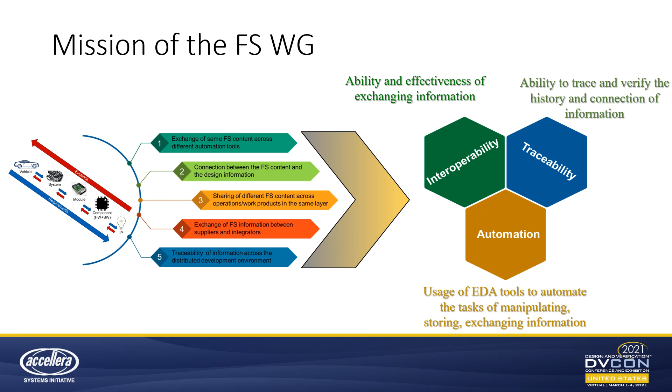So our first objective has been to provide a functional safety standard that would accompany the traditional design standards and support the need of the functional safety of the safety critical life cycle. So the first step has been to find common ground in the best practices and methodologies across the industry. And then we started to define the functional safety data to enable the data exchange and manipulation. Om will cover this in great detail in the second part.

So this has been our first initial focus, but in parallel, more topics are considered for exploration since they are related to and influence the way the functional safety model is defined. And Gani will cover these future directions in the last part of the workshop.

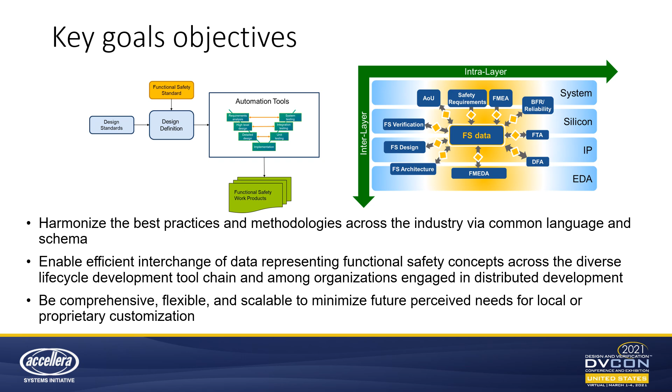One last point before we move on with the rest of the presentation is actually a specification about the type of work that is presented here. We were very keen on presenting the update on the progress we've made and the projects we have, but please consider everything that we are sharing today work in progress, as the group is very active, a lot of discussions are ongoing, and things will probably change and progress as we move along. So just a caveat as we move along with the rest of the presentation.

Hello everyone. In this presentation, I'm going to show what are the motivations of the Accellera Functional Safety Initiative, who are the stakeholders, and the overall scope of the activity.

As we know, the ever-growing implementation of electronic systems for safety-critical applications is posing a growing risk associated to the possible failure of such systems. The definition of functional safety standards such as ISO 26262 for the automotive industry or IEC 61508 for industrial applications and other standards is made with the intent to give guidance to the suppliers of those systems on how to mitigate those risks during the product life cycle.

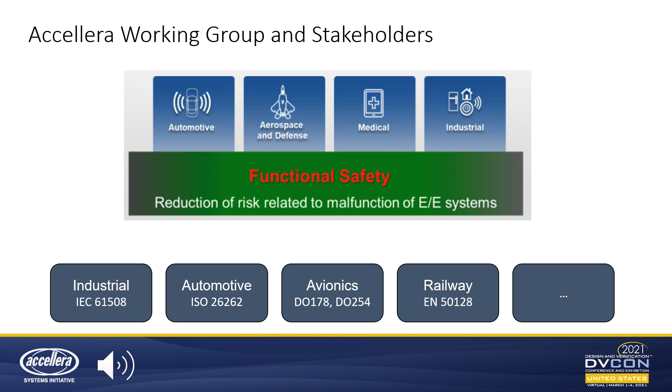In this context, Accellera formed a working group of functional safety practitioners and experts with the intent to develop a standard aiming to provide a consistent definition of the functional safety data to be exchanged among different actors of the industry in order to improve automation, interoperability, and traceability. The standard aims to specify a data model, language, or format in order to exchange data seamlessly among functional safety artifacts and across the different layers of the supply chain.

To achieve functional safety of an entire product, such as a car, for example, or an aircraft or an industrial robot, the system and all its components are developed taking care to avoid or mitigate all the major risks associated to possible product malfunctions.

All the parties participating in the system development, the suppliers of IPs, components, modules, and the vehicle or robot itself, must all work together to achieve safety goals identified for the system in order to minimize such risks. The problem is that such a collective effort is distributed among different companies who therefore need to coordinate their outcome in order to ensure consistency of the safety goal of the final product.

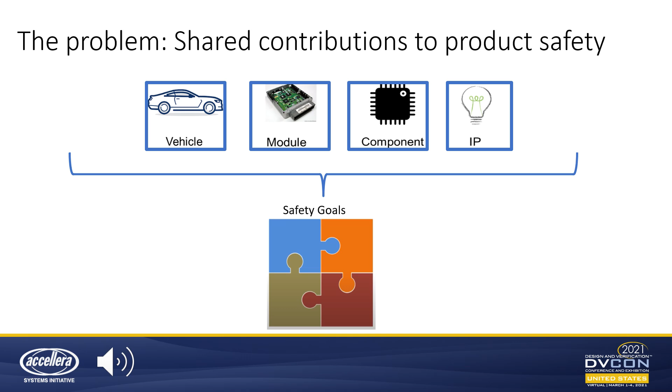The life cycle of the development process of safety-related products requires the generation and the management of interrelated categories of information at all development stages. This information may be generated in diverse formats using a variety of electronic design automation tools and originate from all the various suppliers participating in the product development.

Despite having a myriad of sources, all this information must be integrated and exchanged among different organizations while maintaining their integrity and consistency throughout the whole supply chain for the achievement of the functional safety goals of the complete product. The objective of this standard is to foster the exchange of this data between organizations and tools with high integrity and traceability.

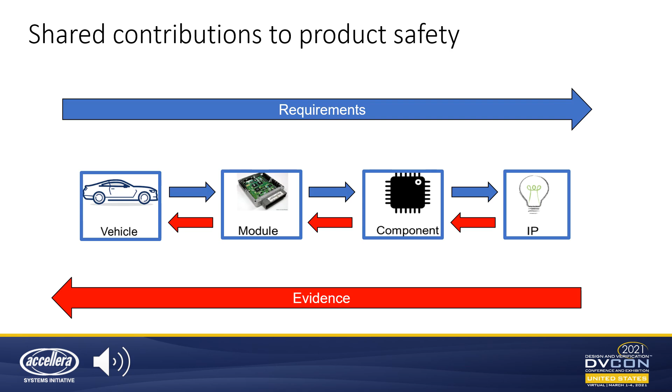Here is an example of activities and work products possibly associated with a safety product from the perspective of different suppliers. Starting from the bottom of the table, the IP and the component suppliers develop their product out of context, that is, knowing the reference market, but most of the time without the knowledge of the specific application their product will be used for. Because of that, for functional safety, they used to do a bottom-up analysis, starting from the basic fault models of their technology.

As a result, for those suppliers, the definition of the safety requirements of their product is associated more to the reliability of the function declared in their product specification, rather than to real safety goals whose violation could harm someone. It's up to the module and final system suppliers, then, who are integrating the IP as a component and who have the partial or full visibility of the possible bad consequence of a failure, to put together this information in a coherent manner, consistent with the safety goals of the final product.

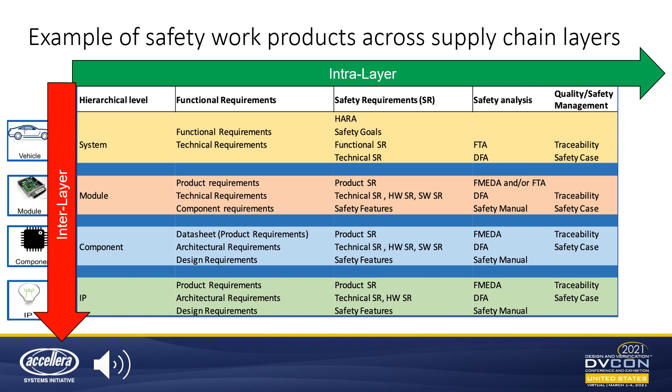We can see that not only it is needed to link the outcome of the different companies composing the supply chain, but also inside the same company many different work products are being produced and need to be stitched together to form a coherent safety case for the subsystem they supply. This poses an opportunity for standardization that should result as an advantage for the whole industry.

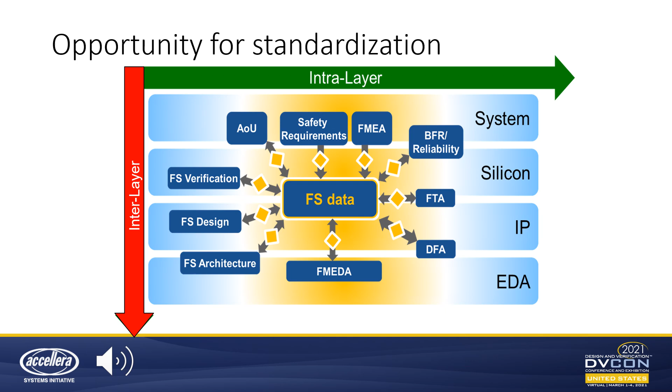Consequently, the Accellera working group has defined the following objectives: to define functional safety data content needed to support activities and work products generation from IP to system level in both interlayer and intralayer use context. To define a language or a format or a channel to exchange this information across distributed development environment of the functional safety lifecycle.

The standardization of data exchange will result in advantage for the suppliers at different levels of the supply chain who need to exchange and have traceability on safety requirements, safety analysis, verification evidence, etc. It will be an advantage for the system owner who owns the safety case of the whole system, is the one interacting with the public and regulator, and is the first actor involved in case of lawsuit. Therefore, it has all the interest to achieve clarity and completeness of the evidence supporting the safety case.

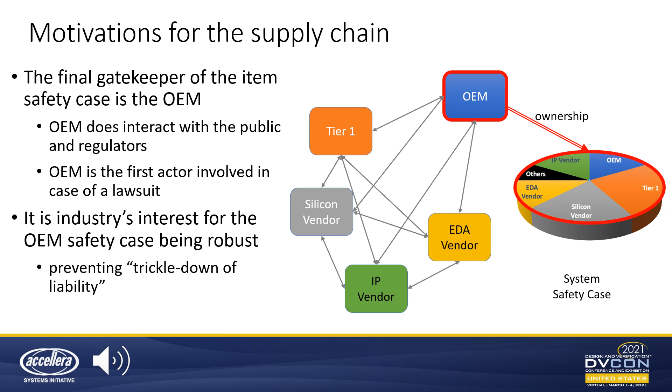But for this very same reason, it is also in the interest of the rest of the industry that the data and their structure are crystal clear for the system owner, in order to avoid involving the system suppliers in case of lawsuit due to lack of data clarity. The standardization of data and of work product structure would allow a better review of the work product provided by a supplier to their client, if it is clear from the beginning what is the expected format of the evidence that will be given. This in principle is true at all levels of the supply chain.

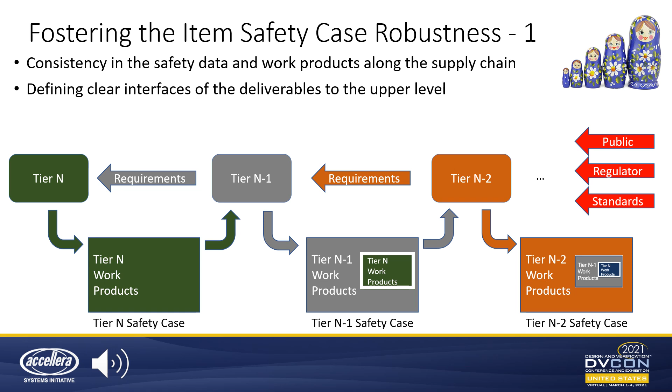Let's imagine a Tier 1 who needs a set of work products and data from different silicon vendors as evidence of the definition of safety requirements for the semiconductor components used at system level, their safety analysis and the verification evidence. Currently, the format is left to be defined by the suppliers, or in some few cases the Tier 1 is in the condition to define them in advance with their suppliers as part of the technical negotiation. In both cases, the integration requires an effort that could be quite reduced if the format was a given from the start for every actor involved.

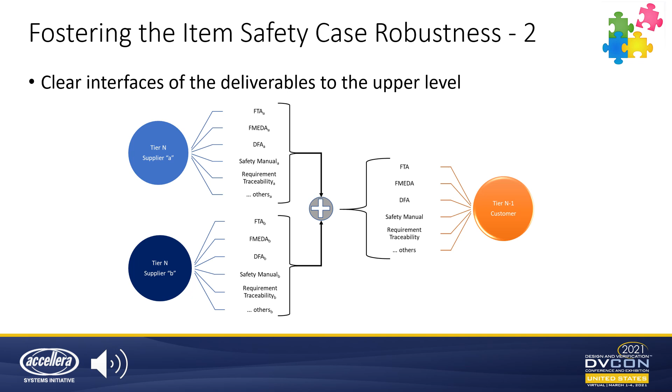If we look at the issue from the semiconductor vendor perspective, today there is quite an effort spent to explain the format of the data provided to their customers, show their completeness, and in many cases customize their format depending on the customer needs. This is the case for semiconductor vendors, but also for any suppliers like IP vendor, Tier 1, or even EDA vendor. Most of this effort and unnecessary variability could be saved if the data and work product format was defined from the beginning for everyone.

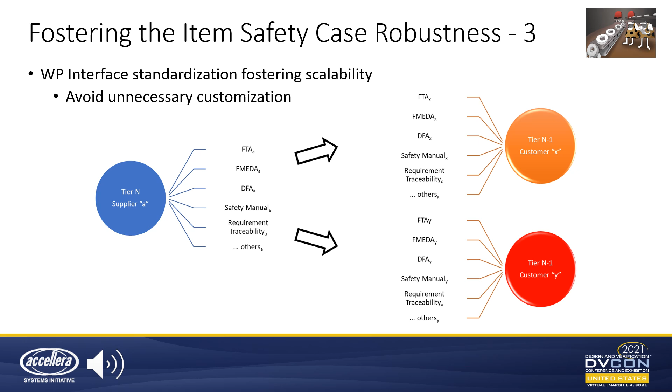An important aspect of managing functional safety development is the requirement for traceability of information, that is, the ability to have an origin and a course of development to follow through the chain of requirements and modification that a product goes through.

This holds true for both intra-layer and inter-layer management, but can be especially challenging when different actors in the supply chain are involved. In case of a liability case, for example, traceability is key to identify the root cause of the accident. On a more regular basis, traceability is also required to perform an impact analysis, which relies on a solid change management system. Similarly, it allows for verification and validation of requirements as captured in the V model.

Another example of the need of recorded and documented information are the assumptions of use involved in the development of a safety element out of context. That is the definition of safety requirements by the component vendor to their customers in order to preserve the safety of the component during system integration.

The functional safety standards require to maintain and demonstrate traceability of the safety data across levels in the supply chain and among work products, with information justified, documented, and preserved for years in a safety case.

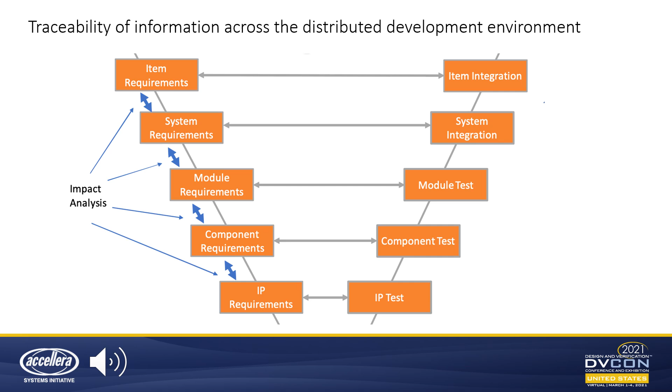Although several products and strategies are available to aid the ability to trace information, a full holistic approach is not available, and a non-negligible portion of the safety data exchange is handled manually or ad hoc, leading to an error-prone and effort-intensive solution. A clearly defined and standardized format for the exchange and integration of functional safety data can significantly improve the efficiency and confidence in the integrity of the development process.

To recap, the mission of the Accellera Functional Safety Working Group can be summarized in these three characteristics of the development process: interoperability, traceability, and automation.

The goals of the Functional Safety Working Group are to unify and standardize the methodology to exchange functional safety data for functional safety activities, such as analysis, verification, validation, optimization, implementation, to produce work products such as FMEA, FMEDA, assumptions of use, fault tree analysis, dependent failure analysis, safety requirements. Define a language format to exchange the functional safety data across the distributed development environment of the functional safety lifecycle.

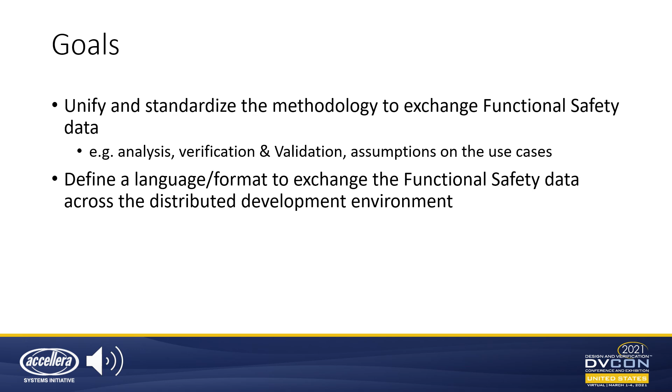The scope of this effort develops across several dimensions. These are illustrated in this slide, but it is not meant to be an exhaustive categorization. The green boxes define the scope of the Functional Safety Working Group and capture how the work will proceed in phases. The immediate focus aligns with the content below the dotted lines, while the content above is planned as a next step.

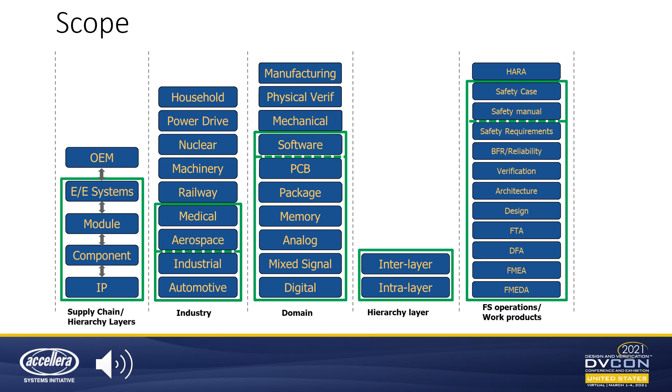Hello everyone. In this presentation, I will talk about challenges in the domain of functional safety and then about the work being done in Accellera Functional Safety Working Group to enable the community.

Functional safety data and the scope. What is functional safety data? We at Accellera Functional Safety Working Group define functional safety data as the information needed to perform functional safety operations and generate the associated safety work products. The goal of such standardized safety data is to enable interoperability and traceability across work products and processes within a development level or across the supply chain, that is intra-layer or inter-layer.

Such data should allow to develop an industry-wide functional safety aware flow to bridge the gap between the well-established methodologies for design and verification of the products and the ever-growing requirements for safety work products, covering different domains, industries, and supply layers. I would like to highlight that the goal of this exercise is not to standardize, for example, the functional safety analysis format, which is already covered by the existing safety standards, but to enable the realization of the requirements of the standard.

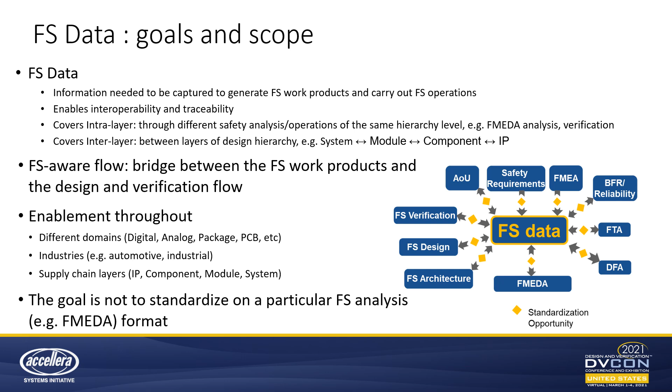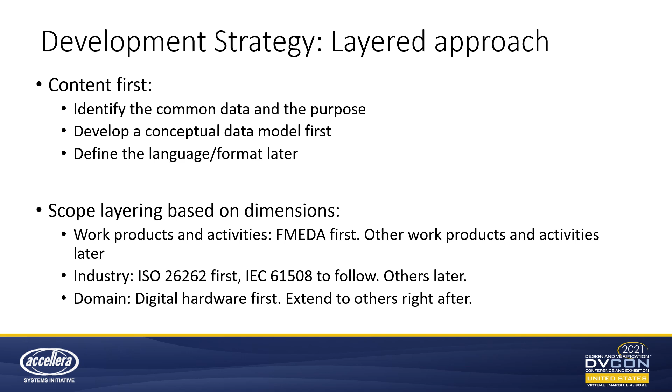A layered approach has been adopted for the development of the functional safety content standard, where the focus is to identify and agree on the content first as part of the conceptual data model. The conceptual data model then drives the language format of the functional safety data. Similarly, scope is layered based on dimensions, namely work products and activities, industry segment governed by the relevant safety standard, and the domains like digital hardware and others to follow.

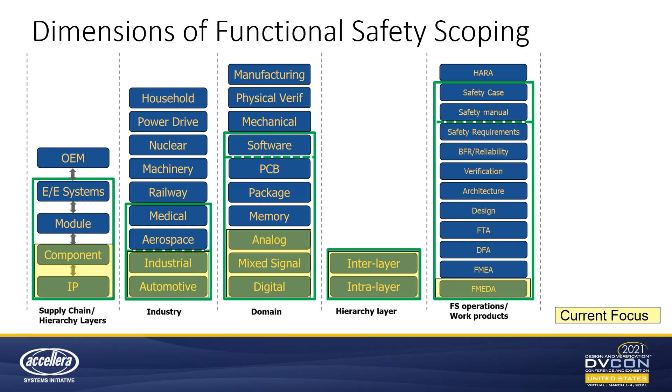The scope of the data model activity is spread across industries, domains, and stakeholders in the supply chain over the safety work products. Current efforts are focused on enabling the automotive semiconductor industry in the safety analysis, primarily FMEDA, by standardizing functional safety content.

The engagement targets silicon, for example system on chip, discrete but medium to high complexity components like analog to digital converters, digital to analog converters, sensor modules, etc., subsystems composed of multiple intellectual properties, and intellectual properties. Subsystems and IPs include RTL and hard macros, while SoC refers to manufactured silicon.

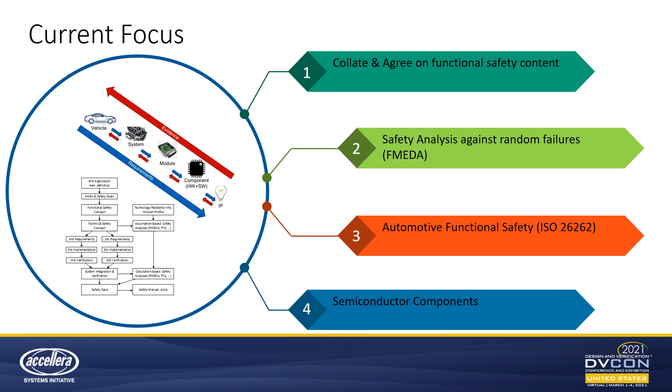Traditionally, in the automotive sector, safety processes had been native to the system and vehicle developers. Thus, the risk was better controlled. With the proliferation of complex electronics into safety systems, the development has become distributed. This has increased the underlying risk and shared responsibilities.

Development of the safety analysis report for use by the end customer is long, arduous, and not so well defined for developers and integrators at each level, that is system, silicon, and intellectual property. It is a much bigger effort for the integrators to create a consistent and reliable output from inputs originating from diverse suppliers, that is, the interlayer communication.

System integrators have to deal with varied information like faults and failures from diverse suppliers. Suppliers have to fulfill requirements coming from different integrators. The product has to comply with multiple safety standards when serving diverse industries. The intra-layer safety analysis has to evolve consistently, accurately, and reliably during the development phase.

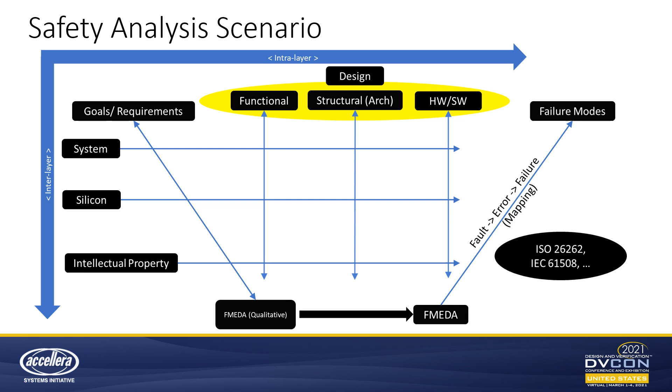The functional safety data model shall capture and classify all the information needed to realize the different safety processes and the work products. It shall include all data independent or related to other safety work products within a layer or across layers. Independent data like failure rates, interlinked data, for example, between FMEDA, DFA, and safety manual. At present, focus is on FMEDA of IP and component.

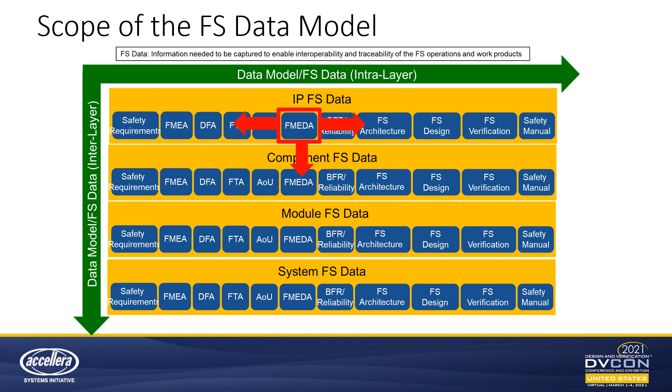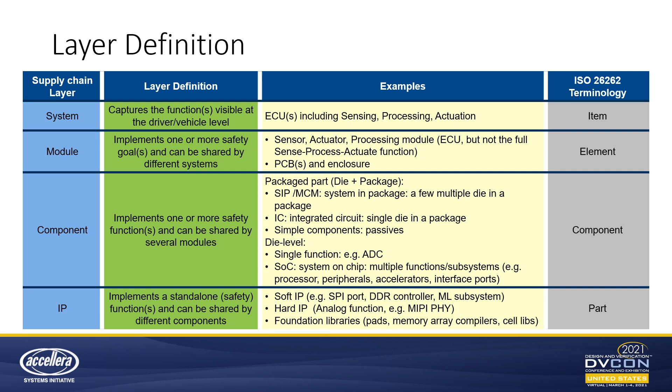The definition of layer has been redefined in the Accellera case to be generic for global relevance and hence to fit different standards. We will now reflect on the activity of the working group towards the functional safety data model necessary to harmonize the industry-wide effort on safety analysis at inter and intra-layer.

The task related to the FMEDA data model has been layered into 3 steps. The first step has been to arrive at a consensus on a generic approach, which serves the concurrent practices and is flexible enough to serve the currently unforeseen methods in future as the product development methodologies and technologies are evolving. Formalization of the functional safety analysis process is the next step which should lead to development of the conceptual data model. Finally, the activity shall culminate into a data model language which should enable interoperability, traceability, and automation.

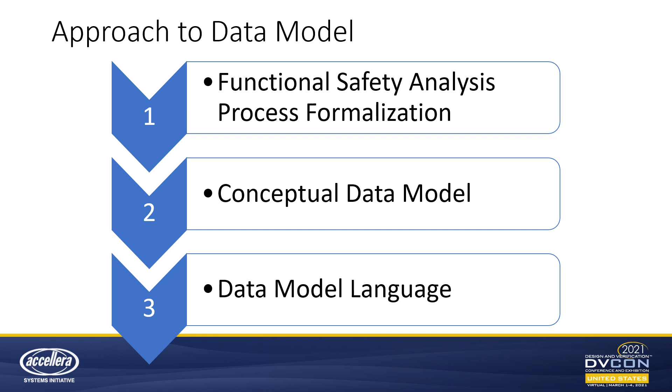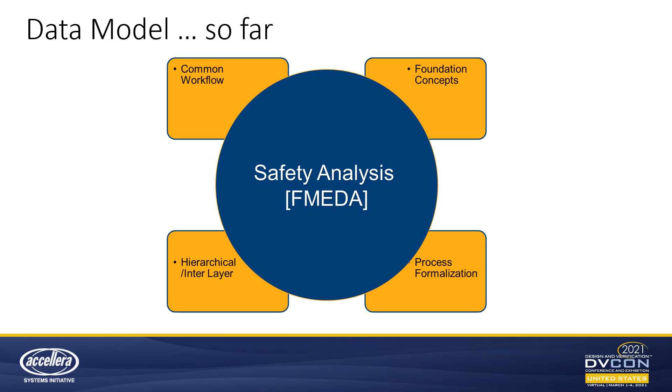So far on the safety analysis data model, work has been done on an assumed common workflow for FMEDA, foundation concepts, process formalization, and hierarchical or interlayer FMEDA. Based on current practice and inputs from the members in the group, a common workflow has been agreed as the starting point.

The analysis starts with a hardware model which can be hierarchical. It may also be a structural representation with physical attributes like gate and area information. The final version is always a hardware structural model with physical parameters. The hardware has an associated failure model which contains the failure mode definitions and base failure rate information from technology.

Each failure mode of the instance has attributes like safety relevance, associated safety measures, and the corresponding diagnostic coverage. In a user-specific safety scenario, the failure modes are mapped to the safety goals or the functional safety requirements. For this detailed analysis, a summary report is finally generated.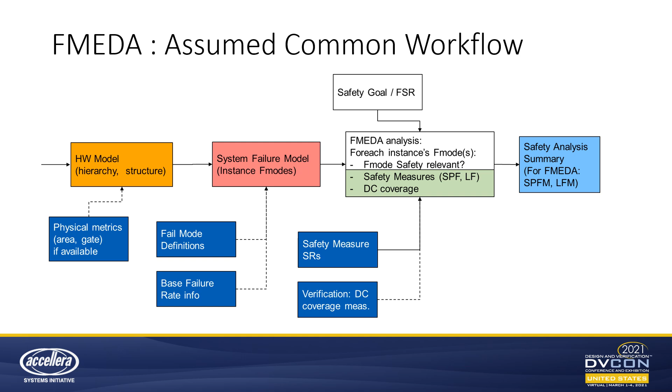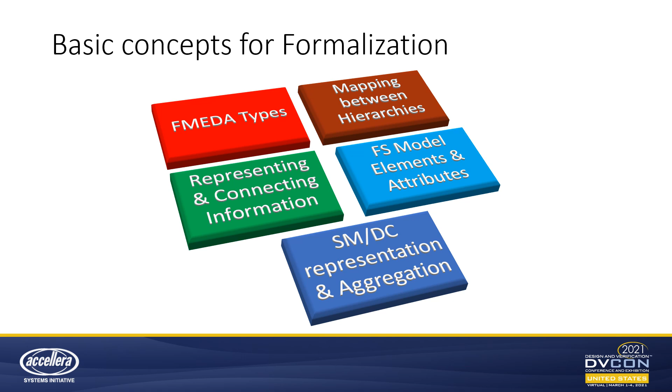Some of the basic concepts behind the safety analysis have been at the core of the activity in the last couple of months. So the basic concepts are FMEDA types, mapping between hierarchies, representing and connecting information, functional safety model elements and attributes, and finally safety mechanisms and the diagnostic coverage representation and aggregation.

For the sake of clarity in the context of data model definition, two types of FMEDA have been considered. First, assumption-based FMEDA, where design metrics are estimated by the user. Second, calculation-based FMEDA, where design metrics are derived from design hierarchy and related data on area. The calculation-based FMEDA is performed after design mapping. And the final FMEDA is calculation-based as far as possible, but can also be a combination of the two.

The rationale for the distinction is that when the functional safety hierarchy and the failure mode hierarchy are linked or associated to the design hierarchy, the total area and failure mode distribution are not assigned by the user, but are derived from the design hierarchy, and care must be taken to not introduce inconsistencies in the data model. The distinction here is not about accuracy.

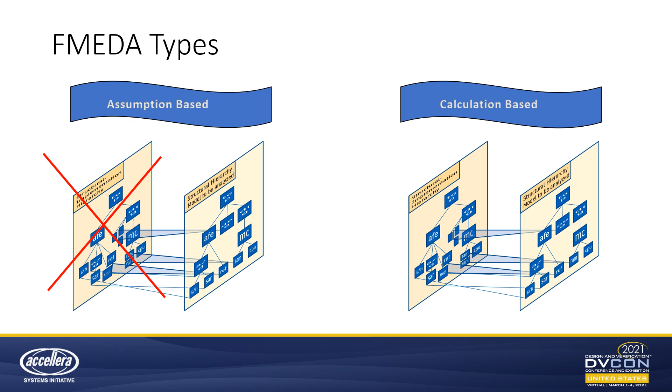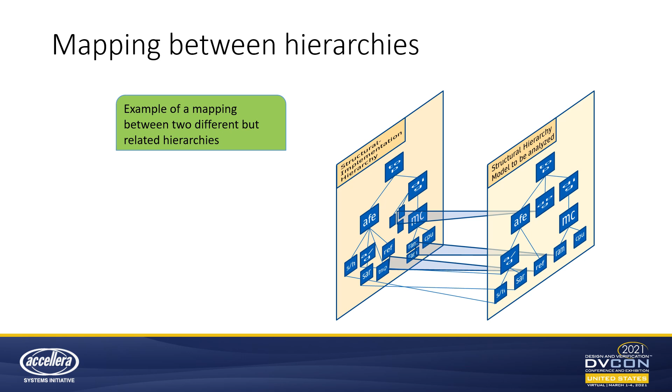Two hierarchies may be related by a mapping function, where each hierarchy is a separate, pre-existing data tree structure. Mapping links are then placed between elements in each tree. Not one-to-one mapping is also possible by combining, partitioning, and repositioning in the tree. Mapping between hierarchies could mean functional safety analysis hierarchy and design mapping, and safety mechanism and design hierarchy.

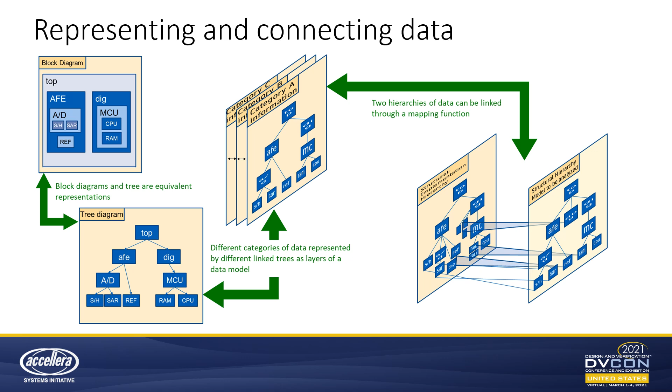A design may be represented in different but equivalent ways, like block diagrams and trees. This representation must be mapped to hierarchy, matching with the granularity of the safety analysis. For example, two instances of a design may require to be analyzed at different granularity and thus require different mapping functions.

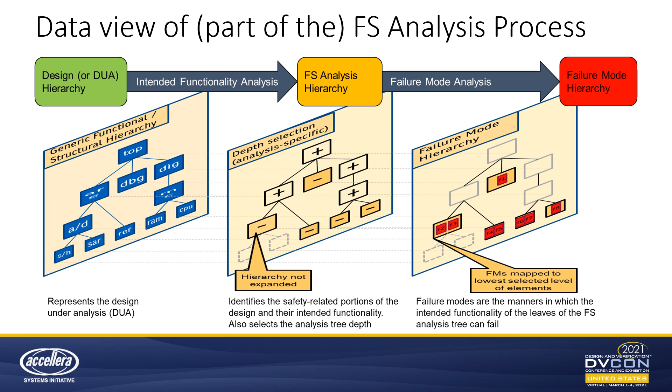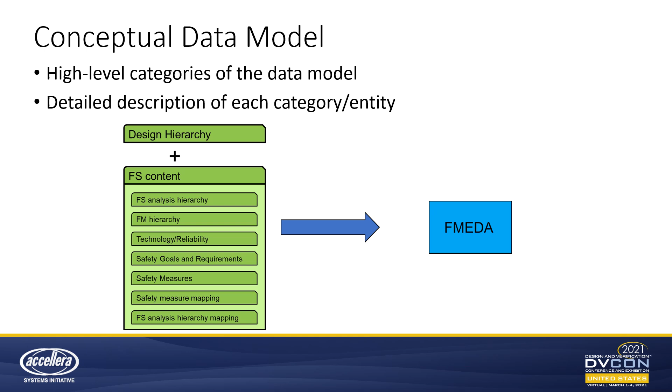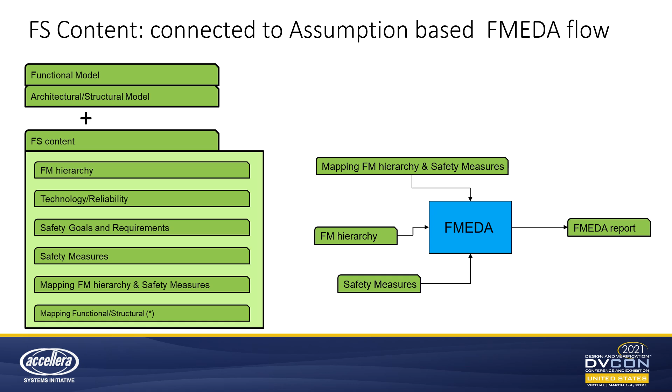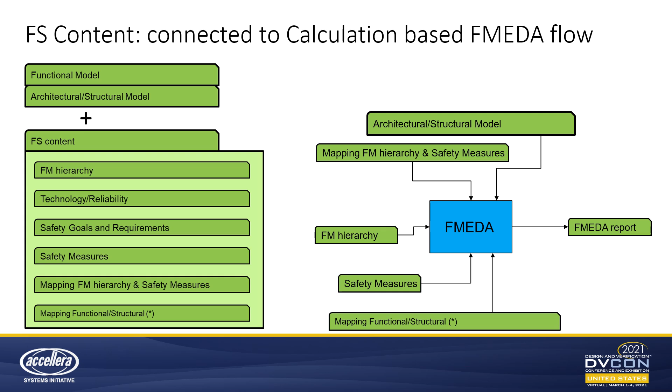A conceptual data model is being worked out where high-level categories for information are being defined. Also, efficacy of the defined categories of information to allow development of the FMEDA using different approaches is continuously evaluated. The assumption-based FMEDA flow is based on lack of availability of associated design hierarchy. What we see here is the paths of the FS data, which is relevant for assumption-based FMEDA. The calculation-based FMEDA is derived from the computation of the failure rates and diagnostic coverage from a structural design.

So what is in the pipe for the future? The next steps are create some test examples of safety analysis and test data formalization. In order for wider coverage of the current practices and comprehensiveness of the model, reviews and feedbacks will be arranged with the developers and integrators of the model. In parallel, continue with development of the conceptual data model with more details. And finally, define a data model language for the conceptual data model. And also to extend the model to cover other safety-related industries and safety activities and the work products.

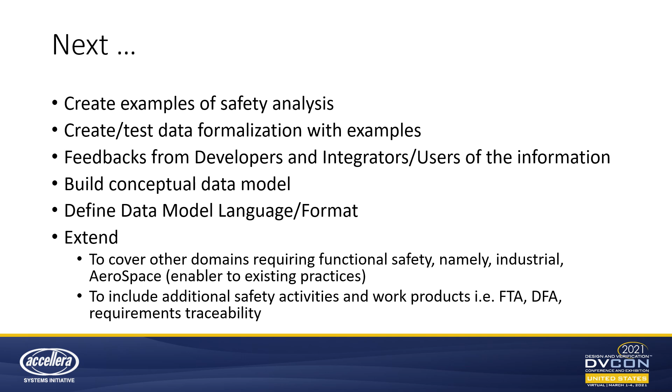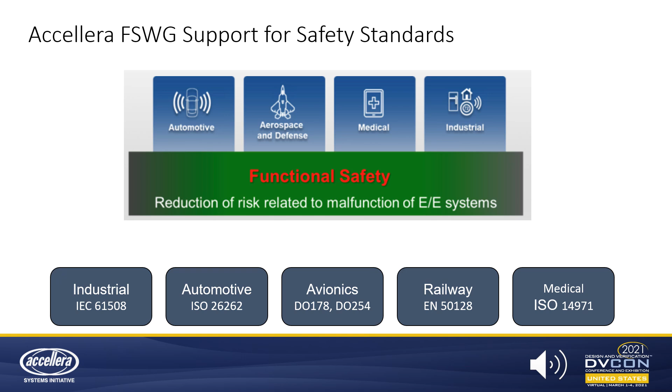I borrowed this slide from Oscar from the previous presentation, and I'm not going to spend too much time on it because pretty much he covered most of it. But I just want to mention that in the past year, our focus was on the automotive markets, specifically the ISO 26262 safety standard. But the plan from the beginning is that we're going to cover pretty much most of the safety standards, and I'm listing here a few of the ones that will be our focus for this year and next year.

Next topic will be the reliability and availability. Reliability, availability, safety, maintainability, and security are several topics under the big topic of dependability. The definition of dependability is the quality of a service that a particular system provides. In the Accellera Functional Safety Working Group, we have been working on safety for the past year, and we continue to work on it this year and most likely for the future. But at the same time, since the beginning, we know that we should have to cover both reliability and availability.

We don't have any near-term plan to cover maintainability and security. Now, reliability and availability and safety, they are kind of very close together. For example, today, most safety products are considered to be fail-safe. But in the future, especially when you go to autonomous driving level 3 and above, availability becomes very important. So we need to make sure that whether it's the data model or the interoperability or intraoperability, they satisfy the availability topic in terms of data fields or communication and so on between the different layers.

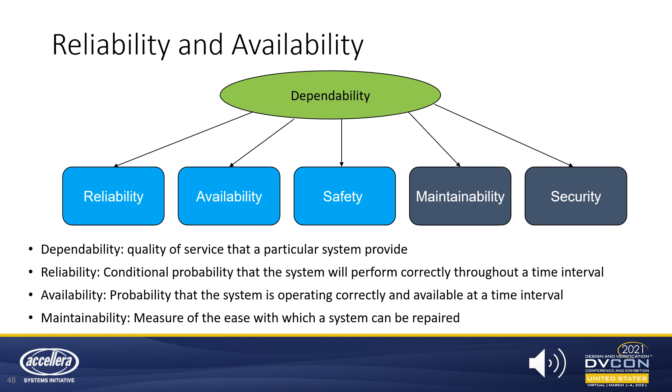Next topic is assumption of use. The assumptions of use are used in safety element out of context development, where the producer of those assumptions lacks the requirement or definite requirement from customers, so they use their own assumptions about those requirements, which later have to be verified by the consumer to make sure that it meets their requirements. The lack of a defined common format for those assumptions makes it a heavy burden on communicating those assumptions across the different layers in development. And also today, there's no way of tying those assumptions back to existing requirements.

The plan for this working group is to define or agree on a common format for specifying those assumptions, identifying methods of how an assumption is validated by the consumer or the integrator, and define responsibility between the producer and the consumer with respect to those assumptions.

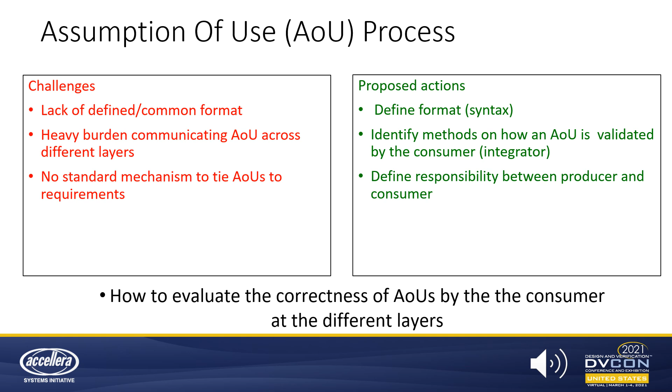Next, we'll be talking about verification and validation. Safety verification is the process of evaluating the system capability or the design capability to detect random failures. There are several techniques out there that are used for safety validation. In this slide here, we're showing 4 of them: fault simulation, formal, analytical, structural. Each one of those techniques has a different way of reporting results. So in a typical design, you probably need more than one technique to complete your safety verification.

And combining the results between these different methods is not easy, and there's no common or standard way of doing that. The reason we want to combine them is because at the end we want to take one simple output that we can feed back or back annotate into the safety analysis tool like FMEDA to calculate the system architecture metrics. So the 2 aspects that we would cover in this working group: one is fields in the data model to support the different validation methods. And second is to propose methods to combine results from those different techniques.

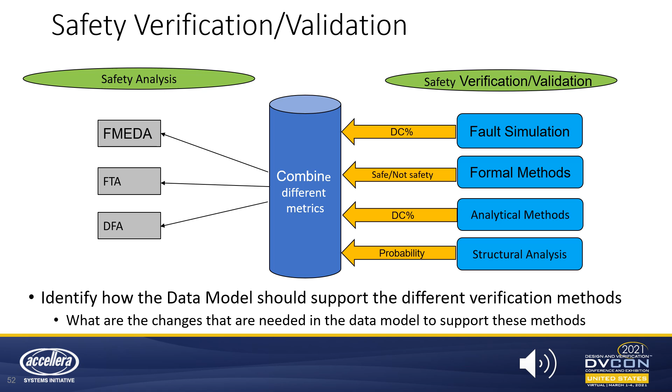We'll discuss next the safety manual. Safety manual is a document that contains all safety aspects about the design. And this is communicated to the consumer so that they can integrate the safety design into their system or their design, including the safety analysis report, the safety features, how to enable the safety features, and assumption of use. However, there's no agreement on the content. I mean, it's left to each company to decide what should go in a safety manual, which can be problematic if you have to customize versions of your safety manual for every consumer. It becomes a burden.

And today mostly the safety manual is written manually. So there's not a clearly defined way of automating the content of the safety manual. The actions that this working group is interested in are to define essential information that needs to be in the safety manual, and then identify methods to enable the automation or partial automation of the safety manual from the data model.

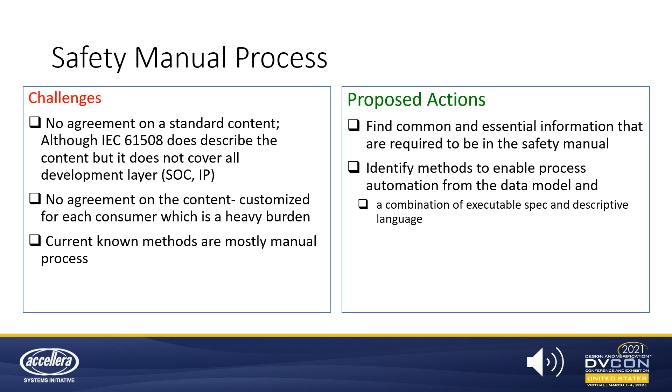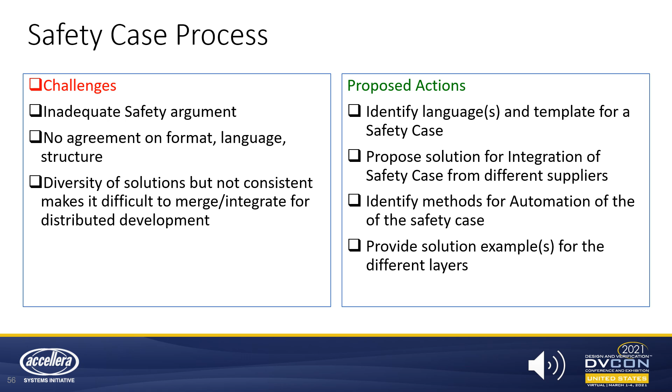Next is the safety case. Safety case is an argument that the functional safety is achieved for the design and satisfied by the evidences collected and compiled in the document. There's inadequate safety argument. There's no agreement, for example, on the format or the language structure. There is a diversity of solutions, but none of them enable automation. So the proposed action by this working group is to identify languages and a template for the safety case, a proposed solution for the integration from multiple suppliers, identify methods for automation, and provide good examples of a safety case.